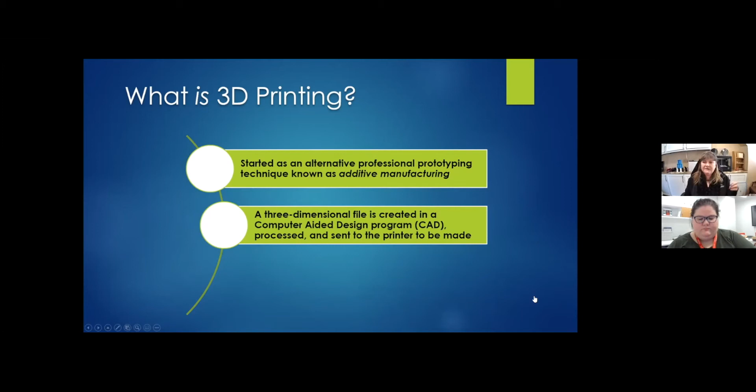So you can't start with a 2-dimensional object. You do need to start with a 3-dimensional object. If you have something 2-dimensional, you can do it kind of like a flat, thick piece, but it won't have that 3-dimensionality. So you need to use some kind of computer-aided design program. And that sounds way scary, but it's not bad at all, really, I promise. Once you've done that and created a 3D object, you'll put it through some other software and then send it to the printer to be made.

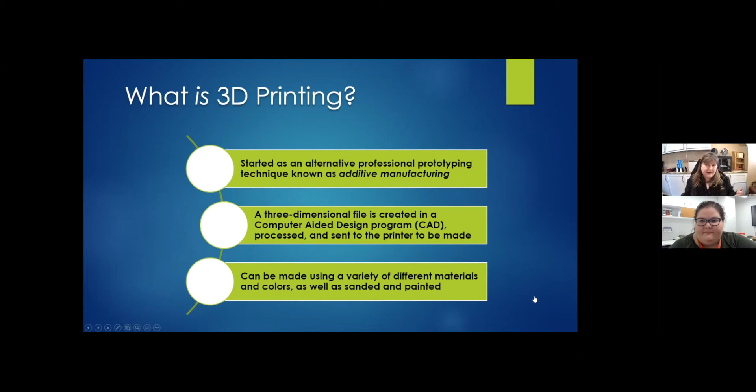So there are lots and lots of options for materials, colors. You can glue things together and sand them and paint them. One of the popular things to do right now is the Mandalorian helmet. Most people don't have printers that will do the whole helmet because it's like a head-sized thing. So they'll cut it apart and then print the pieces and glue them together. So there's a lot of finishing that you can do at the end. That's a real quick overview of 3D printing.

And we're going to get into a little bit more with the 3D printer parts. The next couple things I'm going to show you apply in a very general way to all printers. This kind of printer is going to use a filament. I have a little line coming up off the screen. It comes around down into the extruder. The extruder has those little wheel type things there. Depending on the different printer, those motors might be in a different spot. It heats the filament, forces it down through and heats it in this area, and then that filament comes out onto the print bed.

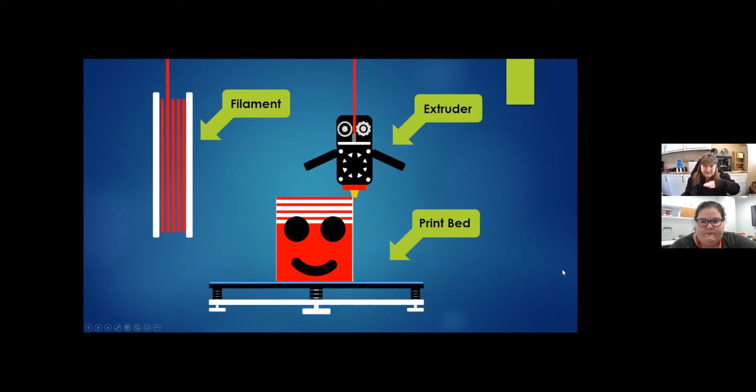This particular model is kind of far into the process, but it starts down at the very bed. It builds on that first layer and moves up, the material moves up. The printers that we have at the regionals are the Ultimaker 3. I said specifically the regional libraries because at Central, they have a little bit different ones - newer ones that are bigger, with a much bigger build volume. Build volume is always measured in millimeters - we use metric in 3D printing. So if you use inches, you're going to have to convert and then convert back. So just start in millimeters.

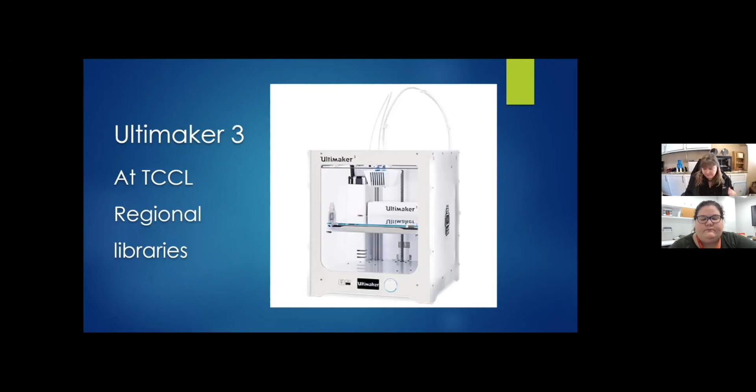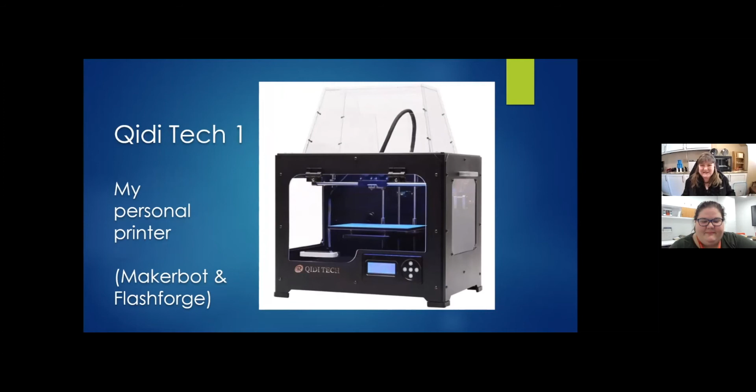I have one here at my house, the Qidi Tech, and that is this machine right here, back behind me. I don't have it going because it's super loud - I mean, they're all kind of loud, but that one would be distracting. There are lots of other ones. One of the other really popular ones is the Creality CR10. There are other ones as well, but compared to the other two we saw, this one is quite a bit different. This version will run anywhere from $150 to $500, depending on what you've got there, but it comes as a kit.

This is not typically a beginner one. Some of the other ones are going to be anywhere $600, $700 to $3,000, depending on features and all that. The Creality is a great system, but it's not fantastic for beginners. So if you can come and learn on one of the ones we have at the library, and then decide to build one, you'll have a better starting point.

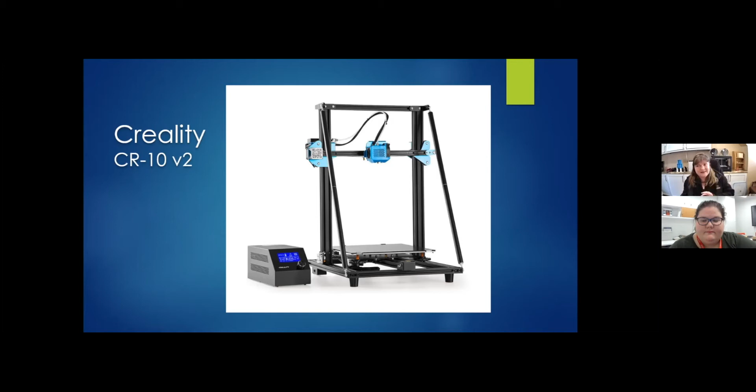There are tons of different styles, brands, and experience levels. Like I said, you can do a kit, or the other kind. We encourage you to come talk to us, we're happy to answer questions and help with that process.

You basically can't do anything 3D printing if you don't have filament. The filament we use is a thermoplastic. It melts with heat and squeezes out, extruding onto the build plate. You can use tons of different types, but we use PLA primarily, and I'll talk more about that in a second.

There are lots of other ones. We also have nylon, which is a little bit challenging - really challenging to use, honestly. There's flexible filament, clear filament, all kinds of different stuff. So lots of colors, lots of materials.

We use 2.85 millimeter PLA, polylactic acid filament. My printer at home uses 1.75 millimeter, so those two can't be used on each other. I have filament at home, and some I bought to use on the printer at work. They'll call it 2.85 millimeter or sometimes 3 millimeter - it's pretty much the same thing.

The PLA is biodegradable, and when you heat it up, it kind of smells like waffles. It's pretty fun. So here's the caveat.

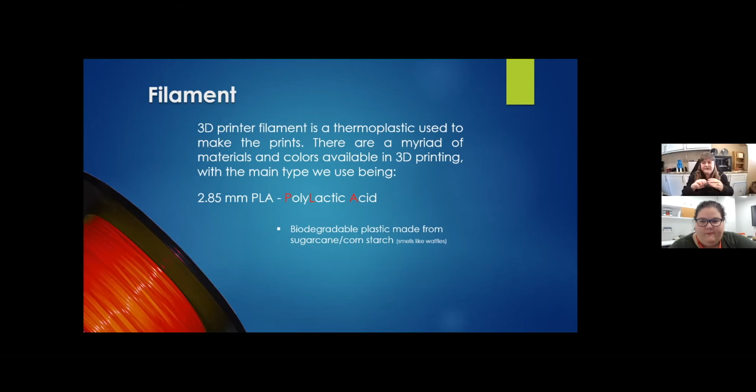For example, let's see if I can show you this - this is a cookie cutter. What happens when you use any 3D printed thing with food is that it has layers, and you can hear the layers as I scratch it. Food particles will get caught in those layers, and bacteria will get caught. So you don't want to use it for holding food, like a cup you'll drink out of, because unless you're going to put it in the dishwasher, which will distort it, it's not going to be safe to use.

That's my little caveat there. You can do things like coat it with resin - there's lots of stuff on the internet about that, so I'm not going to talk much about it.

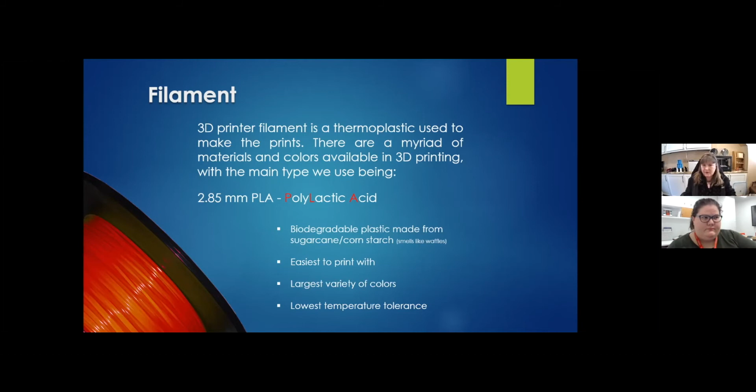One advantage of PLA is that it is the easiest to print with. It's very forgiving, you can do a lot with it. It also comes in a ton of colors and materials, like a stone look, all kinds of different ones. It does have the lowest temperature tolerance, meaning if it's a hot day and you leave it in your car, it's going to melt and deform a bit. Same thing if you put it in the dishwasher - that's going to be way too hot, it'll get all weird. That's a real quick talk about the 3D printer parts.

That's the physical portion of it. Now we're going to get into the digital portion - files, where do you get them? The answer is the internet, honestly, but there are lots of different places you can get it. We're just going to touch on this really briefly.

The idea here is that a 3D printer cannot recognize every type of 3D model out there. So the process is, you get the file type and have to put it through a converter before it can go to the printer. That leads us to importing a file - you'll find your file, import it into a slicer, and that slicer takes the object and puts it into layers so it can extrude and build it up. So you've imported the file into the slicer, you slice it, and then you export it, and that exported file goes to the printer. It's this kind of translation process.

So where do you get the file? There are lots and lots and lots of places.

The thing you want to look for is an STL file. STL stands for stereolithography, which means it's a 3D object, not a flat object.

You can also use an OBJ file. The difference is that it retains a lot of the details that make it look good to our eyes, but the conversion software, the slicer, doesn't care about any of that. That's why you can get away with an STL file, and STL files tend to be a little smaller because they don't have all that extra information.

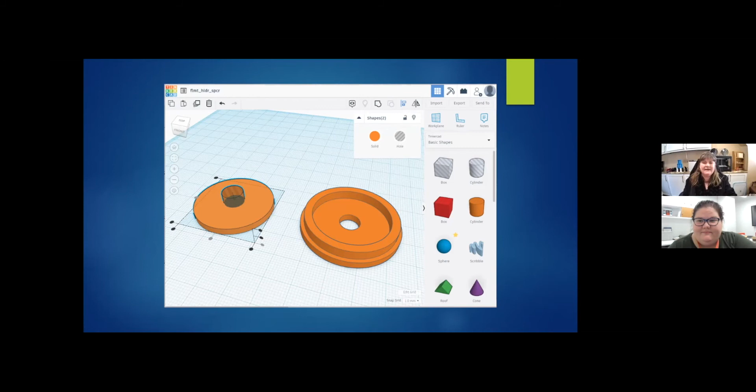So let's move on to Cura and slicing - this is where we'll get into a little more detail. The Cura software is a free download, unlike Thingiverse and Tinkercad which are web-based apps. You'll go to ultimaker.com, or you can just Google Cura download - that works too, it takes you to the same place.

They will ask you some questions, but you just answer those questions and download it, and you'll be good to go.

One thing to be aware of is there are frequent updates—sometimes twice a week, sometimes a month, sometimes two months. At the library at Martin, we're using 4.4.0, and I think they're at 4.9 now. There are frequent updates, but honestly it's not worth it to update every single time unless they're fixing something significant.

One of the things I love about Cura and Ultimaker is the amount of information they share. A lot of the screen caps I have about various software things you'll see in a minute are from Ultimaker, and I have links underneath each slide for where I got the material.

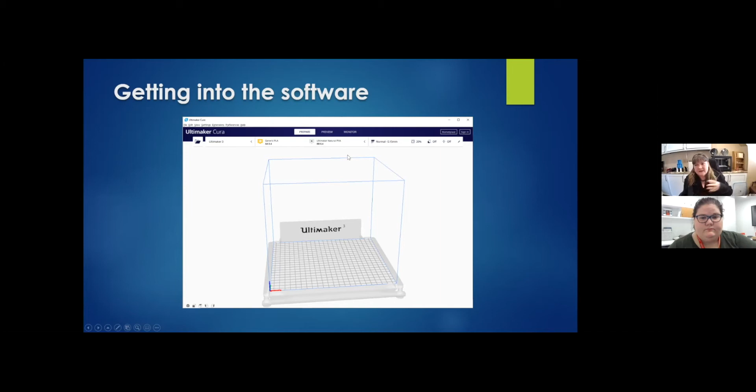When you first open the software, you'll see the standard file settings up at the top, and you'll have this little open window. In this case, I'd use Open or File Open either way to get an object there. For this one, I just opened Cura and then opened the thing—I didn't double click on a downloaded file first. Anyway, that's just a side note.

Looking a little closer at the software, on the left you've got a mock-up of the printer itself, and here's your build plate. One thing I want to point out is these grayed-out areas—these are your margins. It won't let you place an object there. So while it looks like you've got an 8x8 inch space, you don't actually have that much; it's a little bit narrower.

You can push it a little bit, but what I've found is that as you get really close to these edges, sometimes it lifts a bit—it's not totally uniform on the build plate, so the edges will lift just slightly. So if I'm printing the same thing a whole bunch of times, I typically try not to have things around the edges too much.

If you're wondering what you'd want to print 40 bajillion times—when the pandemic first hit, we made ear savers, the piece that goes across the back of your head to hold the mask straps off your ears. I put 12 on one plate and it was a complete disaster; I only got about 7 good ones out of that, so I scaled it back down. But we were really trying to ramp up production.

I have my tower back here of items, and this is what I'm going to use in the thing. I do quilting as well, as does my mom and a couple other people, and this piece is for holding the binding, the outside edge of the quilt. I got really excited about this—my mom doesn't know it yet, but she's getting some of these for her birthday next week, so I've been printing a whole bunch of them.

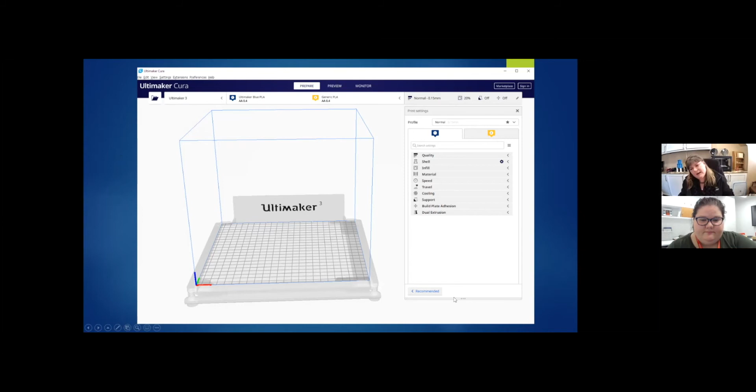It's also right here, these settings right here. We'll go over all this in just a second, but this doesn't always pop up. So if you click up in this section, it'll pop that down, and then you can use this little 3-dot thing. It's not quite a hamburger, but you can pull that down to see the rest of those more advanced settings.

So one of the things we always start with here is the profile. In this case, it's normal, 0.15 millimeter is our layer height. We'll talk more about resolution and layer height here in just a second. But your profile here, you can build a profile and change a whole bunch of settings and then save those settings as that profile.

So while it looks like this is where you would change your layer height, you're changing everything about it. The first time you change that, it'll say, do you want to keep this profile? You can decide if you want to or not, and then you can come back to that same profile later. So if I wanted to change a couple different things about how it was printing and apply that to another object later, I would want to save that profile.

Moving on, that was a lot, sorry. So we talked about profile. The default here is you have these different layer heights.

You've got extra fine, which is 0.06 millimeters. That's very small. So you can either have really small and very fine layer heights with a lot of really high resolution, so you're really going to see all those little details, or you can have speed. You cannot have both, it's one of those inverse relationships. That's why it's extra fine, normal, and then fast. That's why that fast setting says fast, because the faster you go, the less detail you're going to have. So that's just kind of one of those little trade-offs.

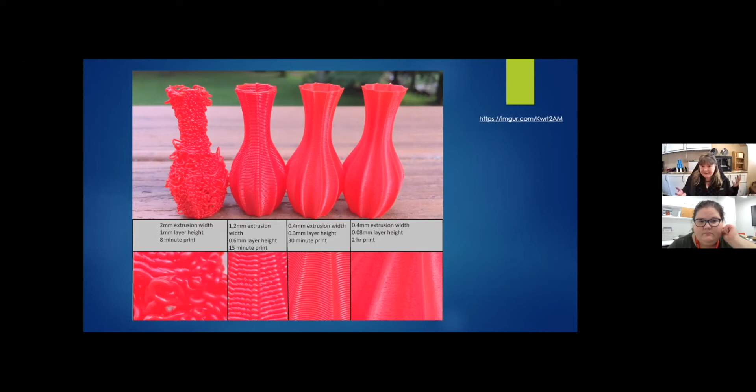So I do want to point out that is a little bit different spot for that, where I got that. I have been trying to track it down. I'm not exactly sure where it originally came from, unfortunately.

So talking about shells or walls, I kind of mentioned this a little bit, just briefly, is something I would want to change for strength.

As you're looking at your profile settings, on the right of the screen when you've got Cura open, you have the option to change the shell. The shell is talking about the outer part of it, basically all the outside portions. Using this here, it's that top layer, the sides, and then the bottom layer. So you can control all three of those, and you can do other things as well, but those are the ones we're really concerned about.

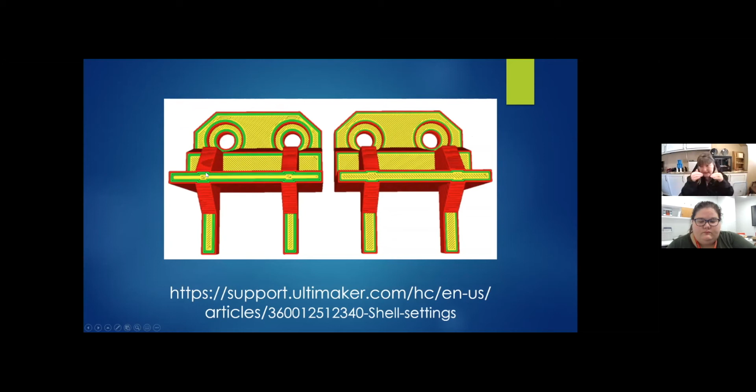So this is not the outside layer, it's like one layer in, more or less. One of these days I'm going to print one of these, but I haven't done it yet. Each one of those on this particular object, each one comes out, you can kind of feel it. You can see that one layer there, it's pretty thin.

And then when you get to 30 walls, and these are 1 inch by the way, when you get to the 30 walls there's no airspace in there, it's all just a solid mass. This is really where the strength of your print comes from. So you kind of have to make that decision about, do I need it to be that strong? Because it will increase your print time as well, since it's more dense. It's going to take more filament.

So that is the gist of the shell. Let's talk about infill. Now we're moving more to the inside of the print. The standard infill is 20% with triangles as the pattern.

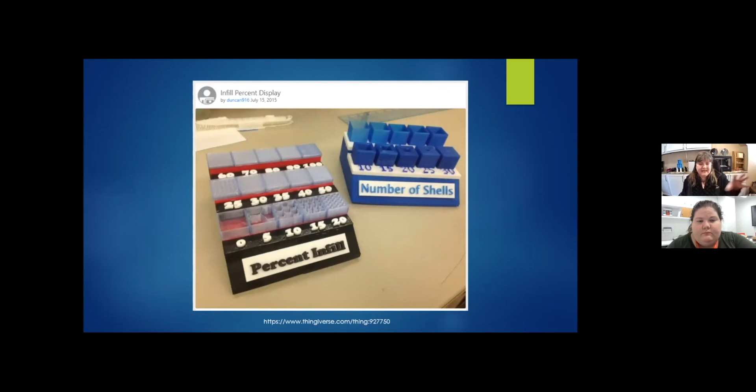There's another link there that's again Ultimaker, we'll go to that in just a second. But here is the same guy made another fantastic illustration, so that's kind of the whole thing. And then this next picture is looking down at it.

You can see down here at the bottom left, that's probably not going to be very strong. This is going to get a little bit better. And of course these are going to be stronger, the whole print's going to be more dense. It's going to take a little bit more filament.

Many times you can have this trade-off between wall strength and infill. You don't have to have strong walls and strong infill most of the time, you can kind of swap them. I used to have more infill, and I've gone to stronger walls rather than infill. But it also just depends on what you're doing.

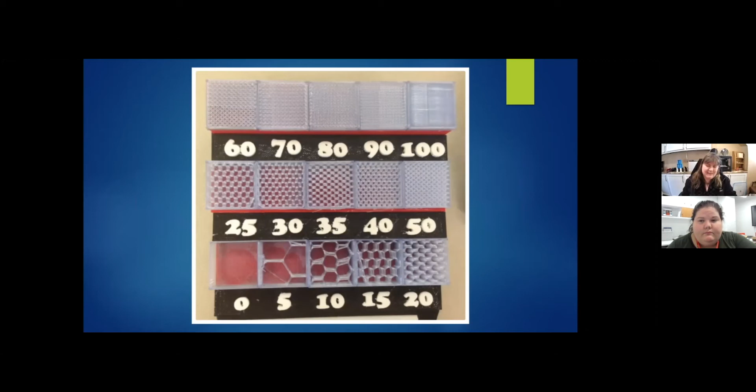Another aspect of this is your ceiling, your top. If you have a low infill, you're going to want to have more layers on your top so that you don't have what they call pillowing - that's when it kind of goes in on your top layer. There's tons of discussion and argument and information depending on where you go and what you look at, so experimenting is the best thing to do.

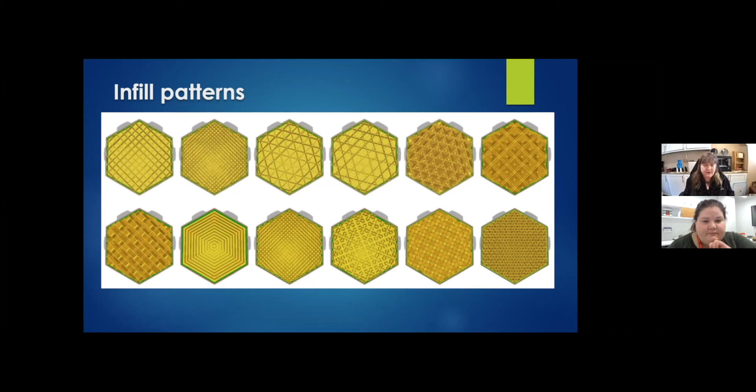With Cura and some of the other slicers as well, they'll have different infill patterns. Some of these are stronger than others. People fall in love with one particular pattern. My attitude so far is it's inside, I don't care, but it kind of depends on what you're doing. Sometimes you may want something that's really, really strong, so some of the patterns are stronger than others, it just kind of depends. This is one of those things you can get way deep into it, but I'm not going to do that right now.

All right, so let's move on to supports. Supports are not always needed. This is a great illustration again from Ultimaker, and the one on the left, you see the red spots on there - that is where it wants support. Unfortunately I don't have my example here, it's at work. But you can do, I've just forgotten what it's called, but it's a curve, and it looks kind of like this - it's got a base on it, has this, and it's the different angles.

So it starts out at pretty much 90 degrees, and then as it goes out, it has more angle to it. The idea is that you print it knowing what the angles are, and you don't print it with supports. Then as you have more hang, you'll see looping underneath. I have a slide here that'll show that. But you can choose at what angle you want the supports to be.

So this one obviously has no supports. This one has an overhang angle of 70, meaning once this curve gets to 70 degrees, it starts putting in that support. And here it's coming in quite a bit further. So this one is 70, this one's 45.

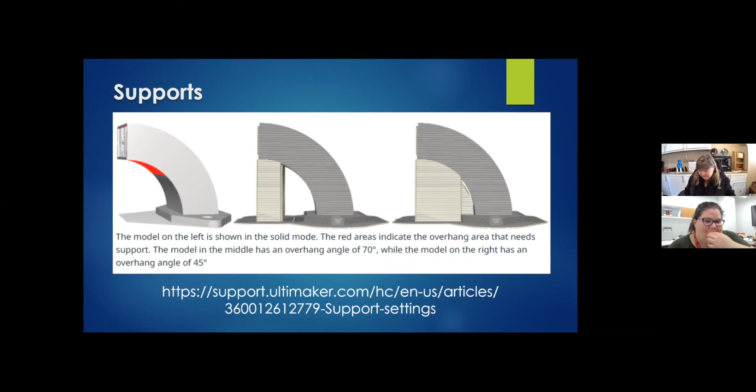Depending on your printer, the filament, and even the time of day, because heat and all kinds of things will affect it. If there's a breeze, there are lots of things that can affect it. So testing is good — having that angle support test is a good thing. You don't have to do it for every color, but do it for at least every type of filament, since different brands can behave differently. If you're having some weirdness, that's not a bad thing to test. There's lots more information on that.

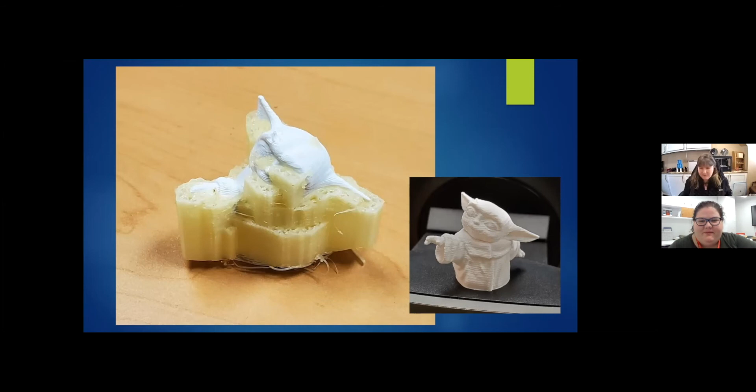That allows you to have areas like this, which is almost a 90 degree overhang, so it really needed that support. His ears here, you can see, needed it too. I'm not real sure why his eye has some support — it didn't really need it. But anyway, you can adjust that. It's not something I mess with very often, I just haven't done it yet.

So that is support. Now let's talk about build plate adhesion. This is one of those things a lot of people struggle with, and I continue to struggle with it from time to time. Build plate adhesion is how well your print sticks to your print bed.

Just a sec here. So I have glass. It's really dirty at the moment. I need to clean it.

So this is borosilicate glass, Pyrex essentially. It can handle a lot of temperature change because it's going to heat up to typically around 60 degrees Celsius. Again, we're not in imperial measurements here.

So this is the clean side. You can hear, there's not much there. There's a lot of glue on there, that's what that is, just a glue stick. The idea is I'm not gluing it to the surface, I'm adding just a little bit of texture so the print can grab onto that. You can kind of see where I've had a lot of circles on there.

So after 3 or 4 prints, I'll typically just take it and wash it off at the sink. They don't all come out that easily. Mine's a retrofit hack, shall we call it. You can't see it terribly well, but yeah, it's not professional, we'll just say that. But it works.

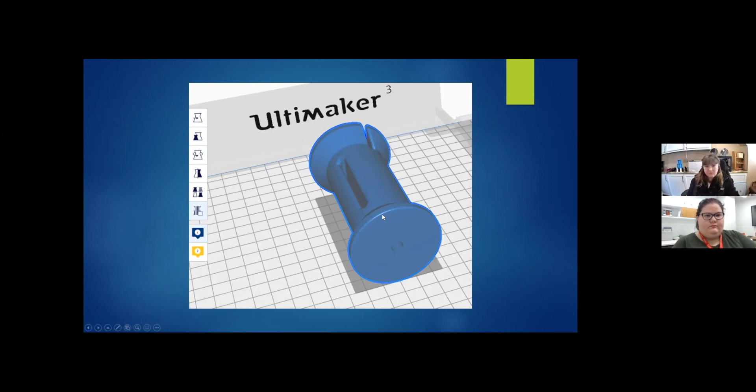A couple things to note here: it has this blue outline, which means it's active. It's not going to assume you want to do something unless you have it clicked. Once you click it, you can interact with these. Right now this is nozzle 1. If I click on it, then click nozzle 2, you right click on it and choose which nozzle you want it to be. So there's a bunch of different settings here, we'll go through them kind of quick, we're doing okay on time.

This is where it is on the build plate. It doesn't have to stay in the middle, you can choose wherever you want to put it, but that's kind of a reference. You can either click and drag it, or put in specific numbers. Since this is a 3D thing, you can go side, front, back, and up and down. You obviously wouldn't want to put something above the build plate unless you had supports underneath it - I don't really know why you'd want to do that, but you theoretically could. It doesn't have to be touching the build plate, but if it's not, you're going to need supports.

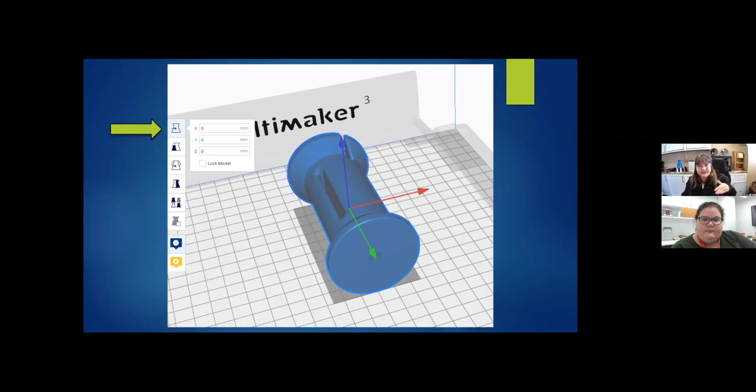So looking a little closer there, that is your X, your Y, and your Z. You can move all those.

Next is scaling, and scaling can be kind of fun. One caveat is you don't want to go too crazy with this. If you do 200%, you can probably get away with that. I think I did 500% once, it did not do well, because you are doing strange things to the underlying mesh - it doesn't have enough points on it when you scale it up that big in a slicer. Now if you were to take it into Tinkercad, you'd have a lot more success with that, because it's adding more points to the mesh.

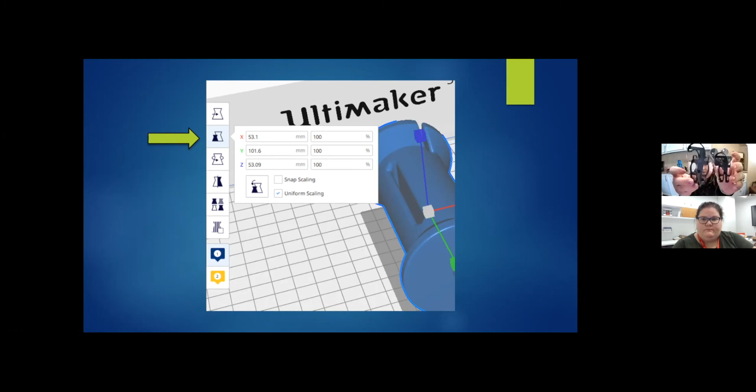So you can scale, it's obviously 100% to start. I often unclick uniform scaling, and then change one dimension. For example, this is the original size of this little cat cookie cutter, and I scaled it up to this one, but I didn't want to scale the height any different - I didn't need my cookie cutter to have twice as high walls. I think I did 150%, maybe 200%, on this one, and the walls got a little thicker, not appreciably, but I left the height as it was and just changed the X and Y, not the Z. So that's one of those times you'd want to unclick uniform scaling. You can play with that, just kind of play with it as you will.

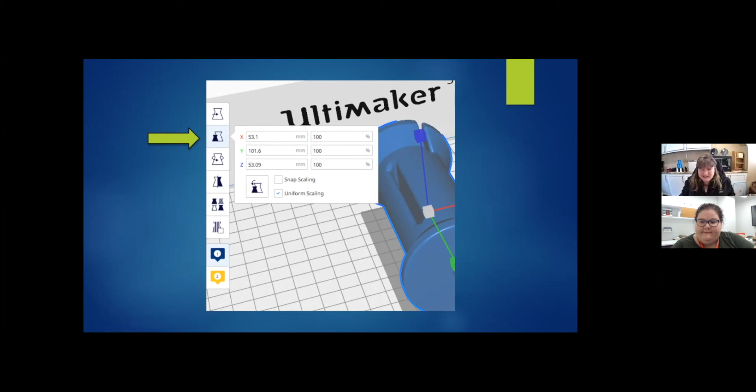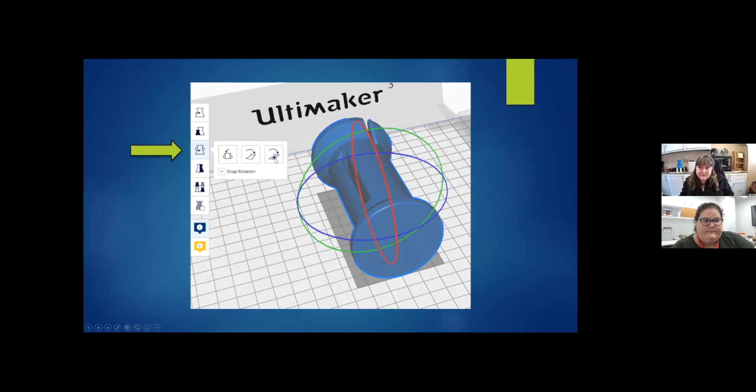So rotation, there's so much fun stuff in this one. I have a video here in just a second, but I just want to point out, you have your object here. This one right here is to reset it. This is to lay it flat, and by flat, it's like this - it doesn't mean it's going to find the flattest side, it means it's going to put it back to where it was as far as flatness. And this last one here is whichever face you choose, it will do. I have a video coming up about that.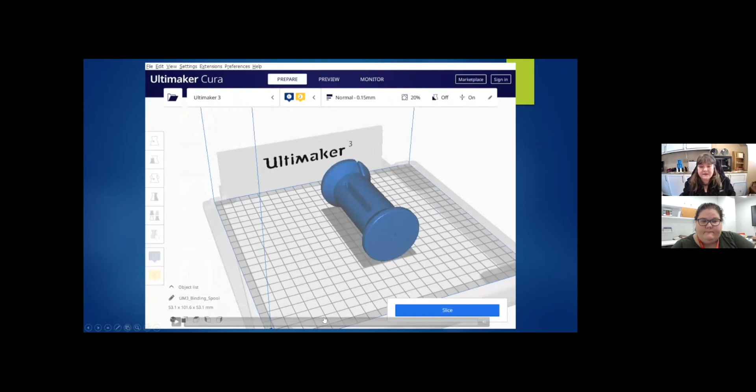So a little closer view of those. They added that snap face one about a year ago, and oh, I love it so much. Anyway, okay, so I'm going to start this video. I got to turn my mic around.

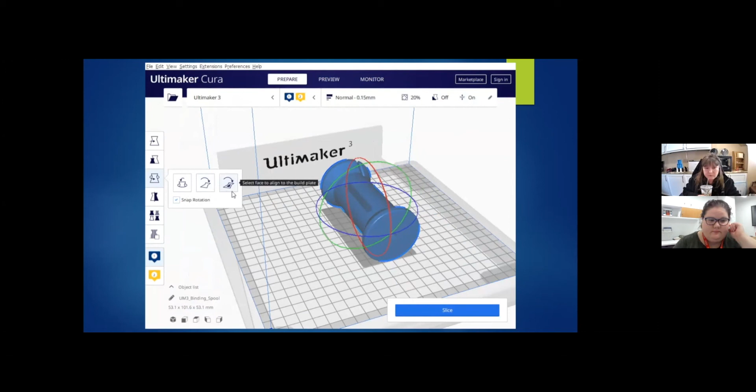All right, so now I'm going to talk about the rotation function. You click on your model, whatever it is that you're slicing or going to print, and if you have the rotation icon selected, it's going to pull up a couple of different options. So reset will bring it right back to where it was when you first imported it. This is to lay it flat - right now it's already pretty much flat, so it didn't do much.

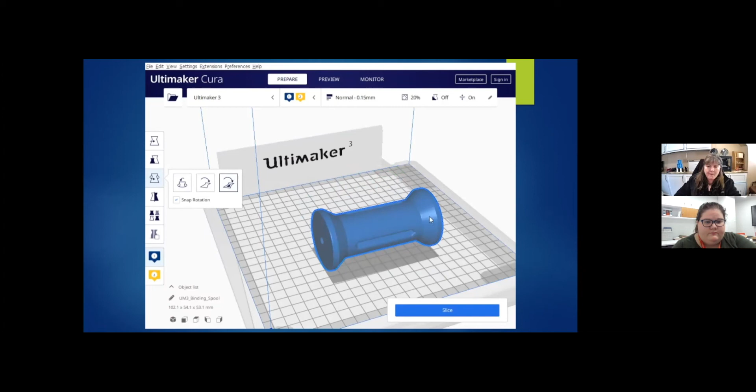But this one right here is my favorite tool. So when you click on this, you can click on whichever face you want to have on the build plate. So if I pick there, it'll go there. This one's round so it's hard to see, but this is really the face that I want down, so it centered it and put it exactly where I want it, that is just fine. I could also say, oh, that's not quite what I wanted, so I can click on that one, and now it flipped it. It's a really fast way to get it to where you want it to be.

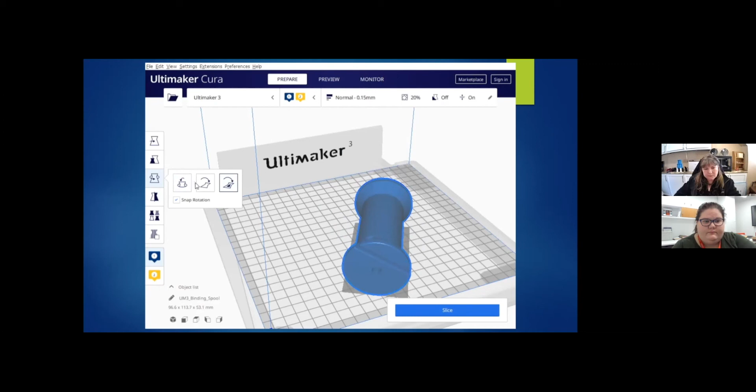So let's say for some reason I want to put it on that edge, and it did it again. So let's say that I just want to spin it - that's the way I do that. There could be other ways, but that's the way I do it.

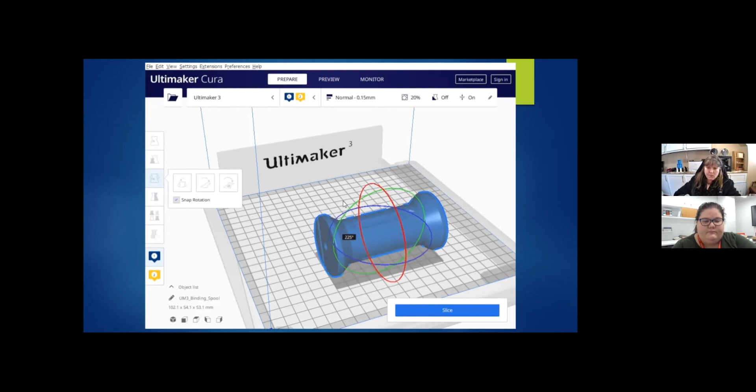So these rings here will allow you to rotate it in a couple of different ways. The blue ring here will turn it in a circle, kind of on a flat plane. The red one will turn it in a circle - you can kind of see it moving as I go around, so it kind of spins it. Depends on what the object is too. And then the green one will spin it a little bit different way.

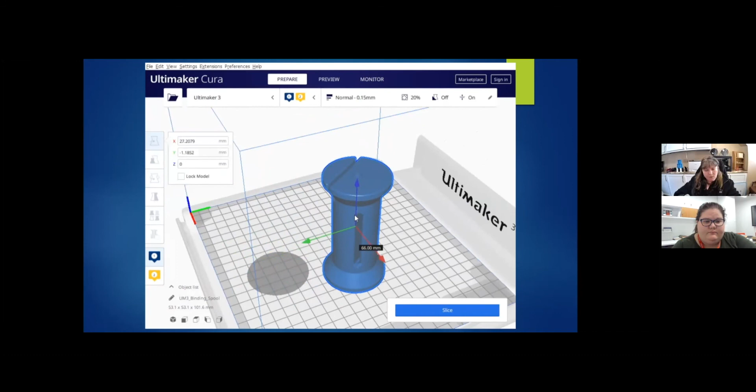So let's say that you've played with it a little bit and it's really not where you want it to be. In this case, I'm going to go ahead and rotate it by holding down the mouse button, and that's the face I want. So I'm going to go back here, click on that, and there we go - we're good and ready to go again. I just move that to the center-ish. Oh, it's not close. There we go, center-ish, and we're good to slice.

All right, so moving on from the last video where we rotated it and got it in the middle, now it's time to actually slice it. The slicing is going to put it into layers that the machine can then lay one layer down and then build up the next one. So let's look at our settings and just check before we hit that slice button.

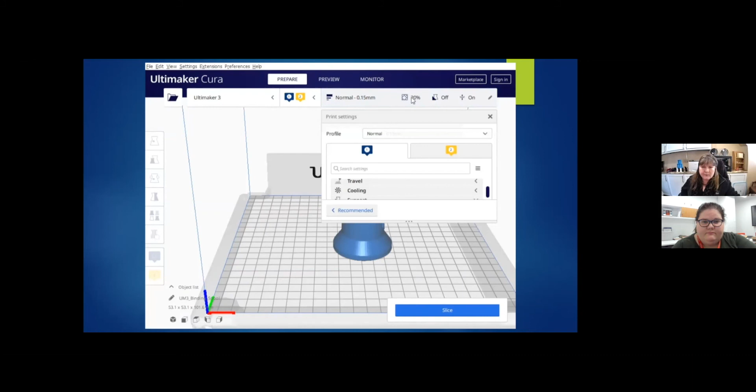So we are at a normal resolution, 0.15 millimeters, that's pretty good. I don't really like the 20%, so I'm going to go back and change that. So we have all of our options here. Layer height is good. I'm going to change the wall count to 4 because that's going to add a bit of strength to this particular one. Everything else there looks good.

For my infill, I don't really want it 20, I want it 10. That's kind of a personal preference thing anymore - some people like it more, some people like it less. I don't really feel the need; I've been happy with the strength of the 10%. So I'm not going to worry about any of these other ones except for, let's see, we don't need any support - it's all 45 degrees or less, which is pretty good for that particular printer.

Build plate adhesion. I always have the prime blob enabled. What that does is put a little blob right down here in this front left corner. That just helps make sure the nozzle is primed, everything is flowing properly, and it helps warm up that whole process.

Typically makes for a better print. So I'm going to change it from brim. I do not like brims, personally. I'm much happier with the skirt usually, since brim is just more post-processing that you have to do. So unless you really need it for bed adhesion, and there are certainly some prints that do, I would usually try to get away with the skirt first.

The skirt can be a couple of different things depending on your settings, but it's typically one line of filament that goes outside the print. It's a good time to really watch and make sure your bed is level, because if it's not, you may see that in the skirt. Make sure that first bead is looking good, if your bed's not too high or too low. It's just a really good way to watch and make sure everything's good.

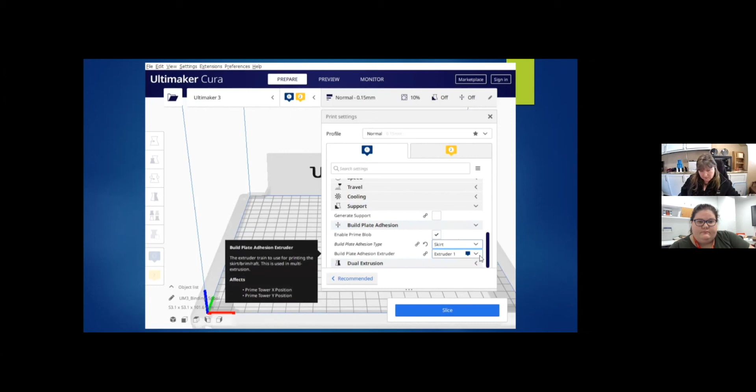So we have 2 extruders here. I'm only really worried about one most of the time, so we're not even going to worry about dual extrusion. At this point, I'm going to disappear that stuff, and we're going to slice it. It'll take a little bit, depending on how complex your print is. There we go. So this particular item is going to take 5 hours and 49 minutes.

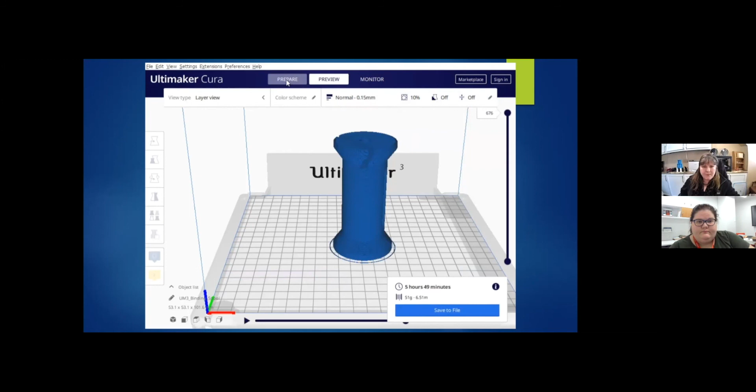So we could save it to a file, or to some removable media, but I'm going to go over into preview. You could see it went from prepare to preview, and now it shows there's my little skirt down there. I'm going to zoom in just a little bit and move it around.

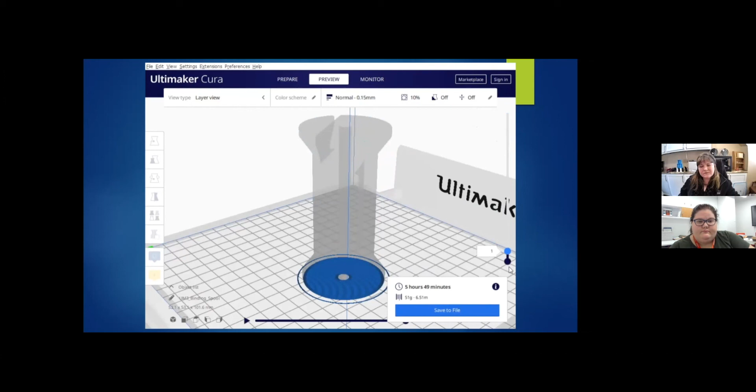So this thing over here on the right is each layer. It's got 676 layers, and if we bring it down to 1, we can watch it build and see how it's going to go. You can see that infill starting, and you can see that inner ring. That ring is going to go all the way through this particular one. You can see it as we go.

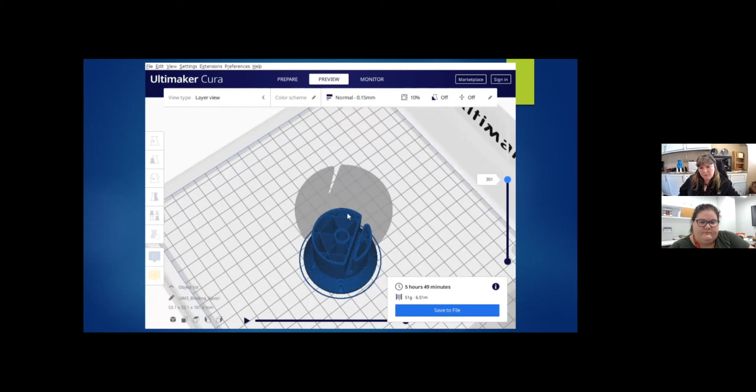Let me rotate it down a little bit so you can see. You can really see how those walls are going to add a ton of strength. Just watching to make sure there's nothing unexpected. There, it's building right there, starting to build the bottom of that little slot, that channel. And coming up, and then there's the top.

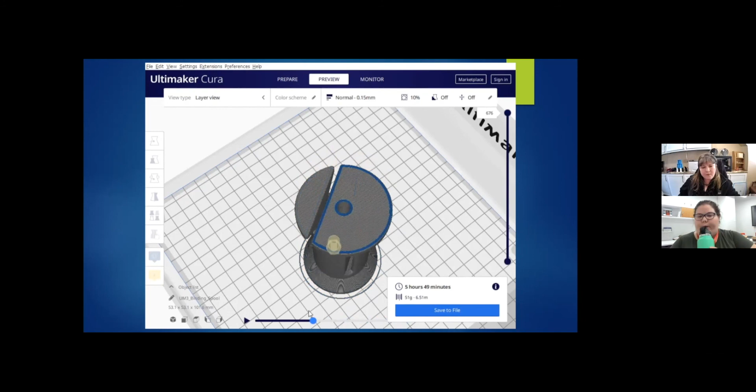This one down here that's kind of covered by the save to file thing, this actually is the path the nozzle is going to take. I don't usually worry about that, but if you have a really complex print, sometimes it's interesting to watch. So that is the slicing process.

So then you could save it to file, or save it to removable media. One thing I do want to mention is that when you do this, it's going to save it as G-code, so you will not be able to come in and alter any settings. If you want to save it so that you can still alter it, you're going to want to save it as a Cura project. What that means is you can go back in and say, oh, I don't really want it to be at that layer height.

I really want a bigger or smaller layer height, or I want to change the number of walls, whatever. You will not be able to do that in Cura if it's in G-code. There are ways to edit that, but for our purposes right now, that's way more advanced than we're going to get today. So just make sure if you want to edit it later that you're saving it as a project. That's it. We can now send this to the printer.

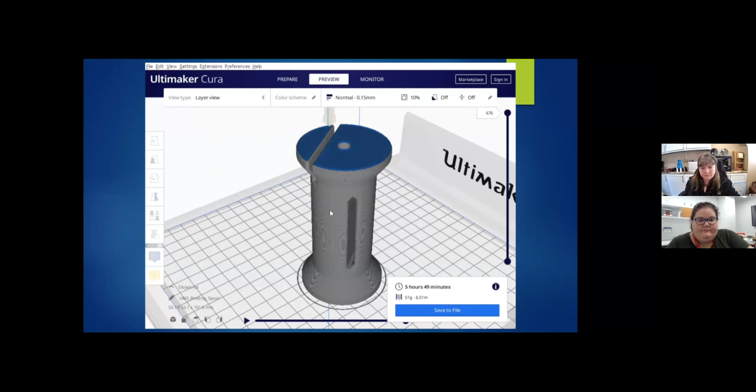I need to contradict myself a little. There is some G-code editing in Cura, but I'm not into that yet. I tried a couple years ago and confused myself. I'll get there, but not today.

Now I get to share things I've learned, a lot of them the hard way.

Yeah, we all have these things we've learned the hard way. I'm waving at people walking by me in the office, like I haven't seen people in so long. Too funny, yes, I love it.

As you saw, manipulating Cura kind of looked easy. When you first start, it's not. It's very confusing sometimes, very awkward. Just relax and breathe and resign yourself to the fact that you're going to hit a lot of the wrong buttons and move things around.

Some of this seems obvious, some of it really isn't. Your left button is to select and interact, just like normal—that's your regular index finger mouse button.

Your right button is to rotate the view, so that's how you spin it. It's not up and down like tilting or moving the bed. As you're rotating, sometimes you'll end up seeing the bottom of the build plate, or you won't be able to see the object at all.

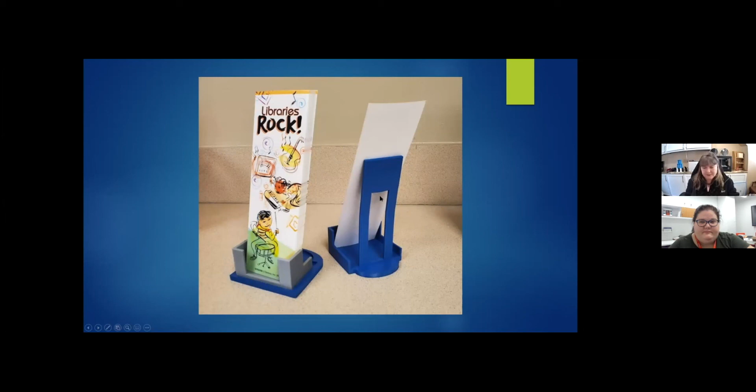So you can see just a tiny bit of stringing down here. This really could have used a little bit of support, but honestly, I still don't really care. It still works. You can print lots of very utilitarian things.

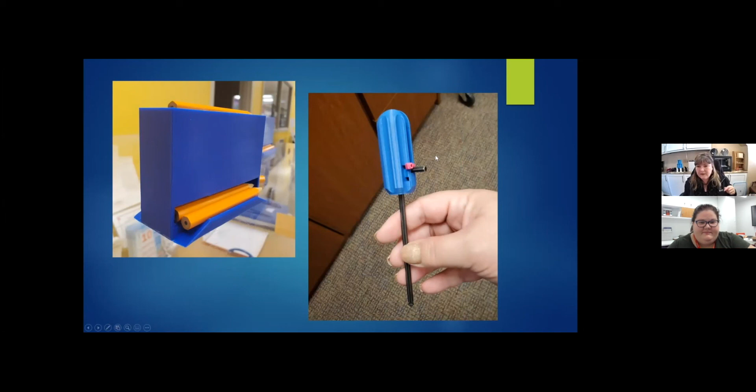And then a handle for an Allen key. So the Allen key goes here because we kept losing it, and with the handle, we've managed to keep it.

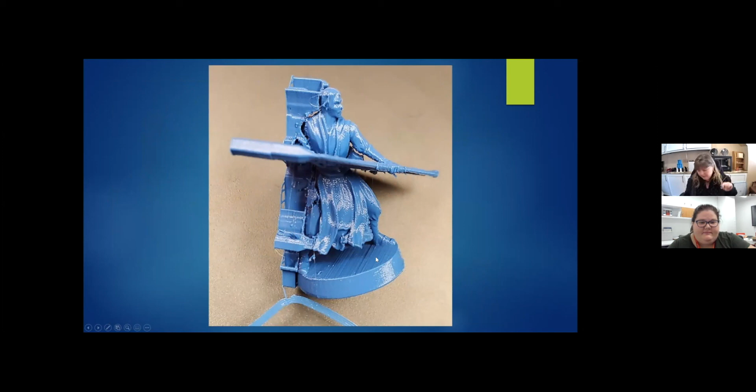Not everything is successful. So this one, I did not have good bed adhesion. It turned out the bed was too low, so the first layer would not squish tight enough to the bed, despite having some glue in there. So it just kind of would push things, do it a little bit and then push them. And so there's a lot of stringing in there.

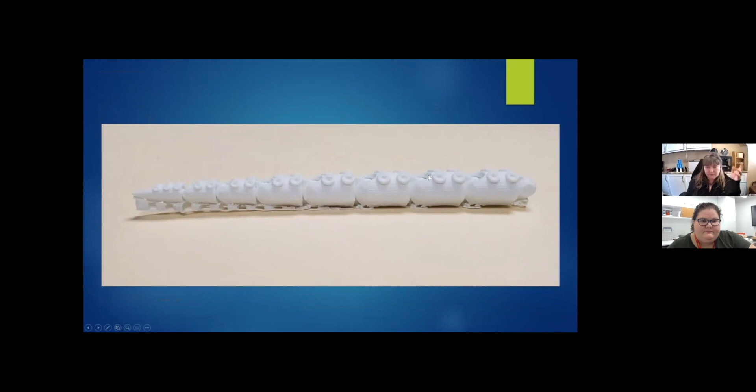This one did work. This is an octopus, so I printed this in place. It's all little joints here, but it has supports down here, you can see on the bottom. You can zoom in here and see where these are the joints where it prints in place. So each tentacle printed in place, and then it had these supports that we had to chip off or break off.

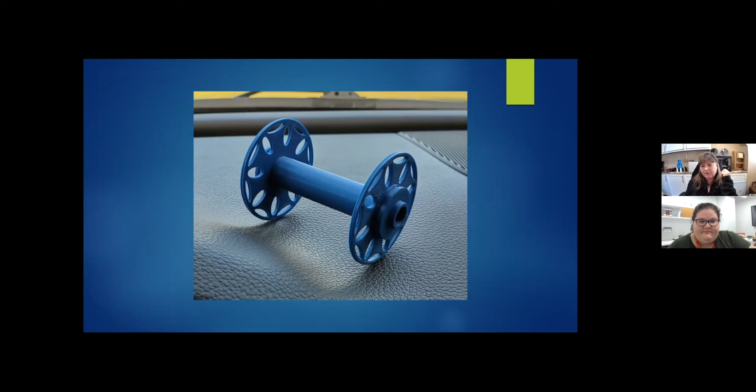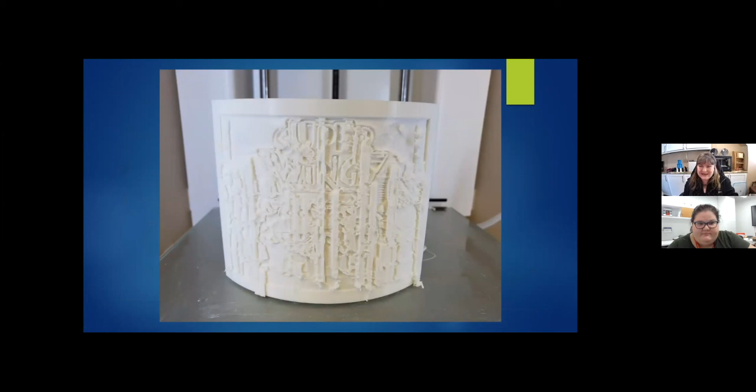This is a lithophane with supports on the front, and these broke off really, really easily. I still don't know why he decided to print it with supports, because most of the time they don't need them. It looks a little scary, but it's not.

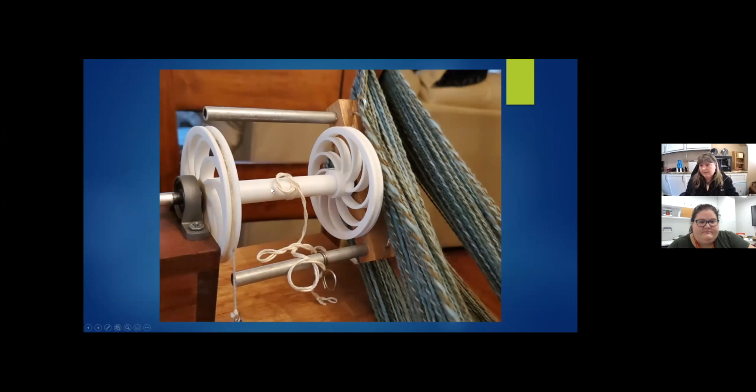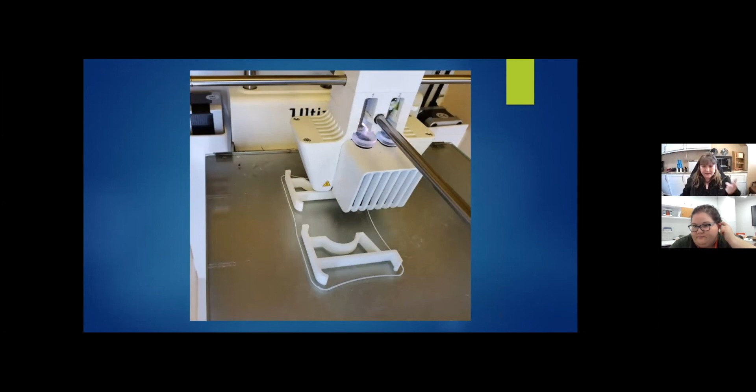Other things you can do - this is for a customer that came in and printed, it goes on the blinds, the header part of the mini blinds. The clips, as I'm sure everybody knows, break a lot. So he found some, we printed them, and he put them back on.

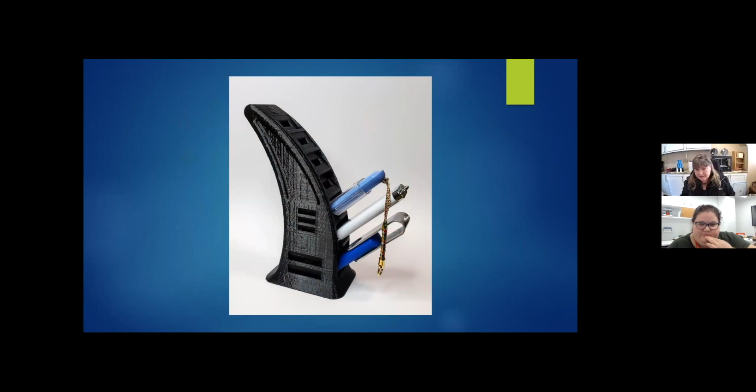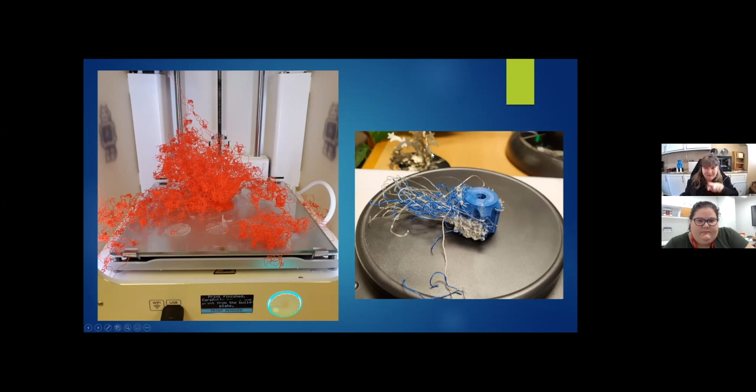There is a neat Christmas tree file that uses that technique, but that's not what I wanted to do. So have fun, save it, and then play, so you can have different stages. Once you get more confident and understand how your machine works and how the slicing software works, you don't have to save quite so often. But save, you'll never regret saving, or rarely regret saving.

If anybody has questions, feel free to drop them down in the chat. I did have one question for you, Kat.

I know with COVID going on right now, the libraries are currently closed. We are opening a few of our branches next week for express service, but how can people use the 3D printers while we are just doing express service and curbside?

We have a couple of different options. Probably the best way to do it right now is if you go to our website and go to our COVID page, it'll talk about how to pick up prints and how to send prints so you can have them printed and come pick them up. If you scroll down to the bottom of that, it mentions 3D printing.

We actually have a portal. If you click on that, you can put your name, your library card number, your contact email address. You can attach your file. It'll ask you a couple of questions. We will probably email you back with further questions because every print is different. So the web form there is a good way to start, and then we'll kind of ping back and forth from there.